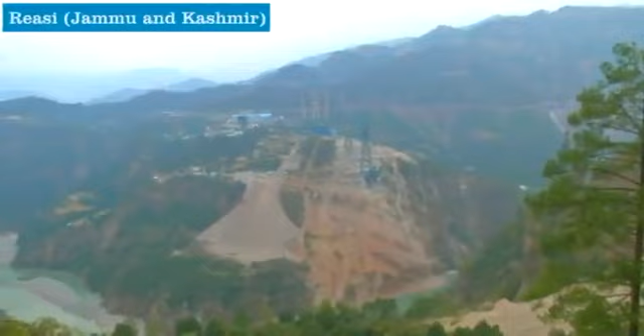The Chenab Bridge in Jammu and Kashmir will be the highest railway arch bridge in the world at 359 meters, that is 1,178 feet, even taller than the Eiffel Tower.

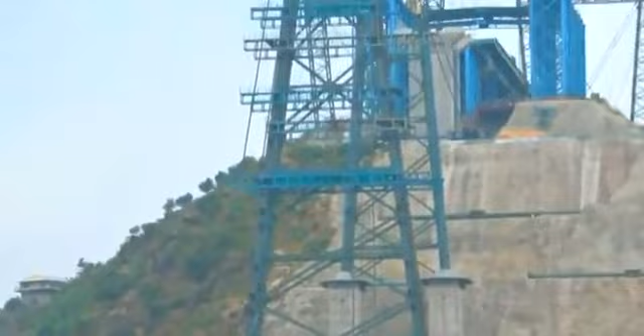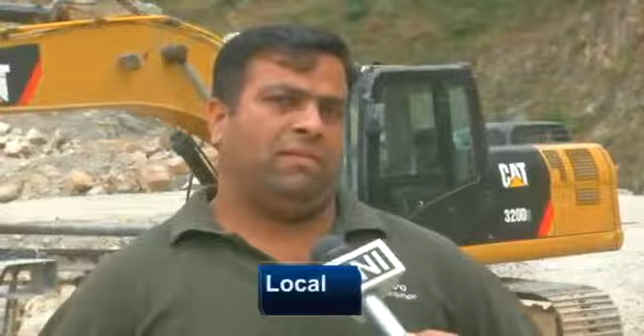Chenab Bridge will have the widest span of Indian broad gauge railway network in the country.

It is the first time in the world that a bridge has been designed for blast load in consultation with the Defence Research and Development Organisation.

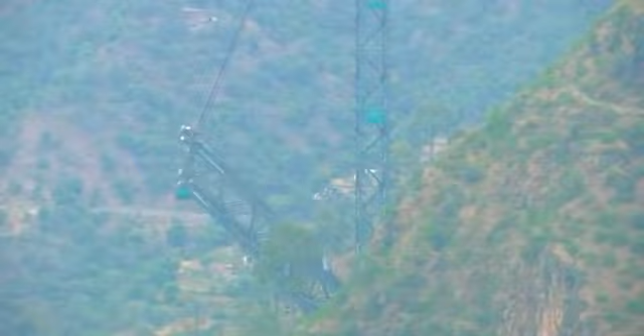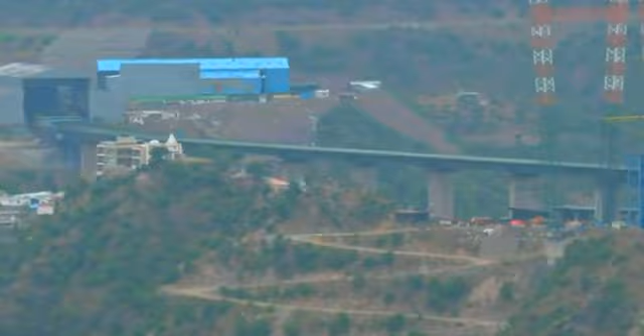An extensive health monitoring and warning system will be planned for the bridge. The bridge is under construction between Bakhal and Kauri in Reasi district of Jammu and Kashmir.

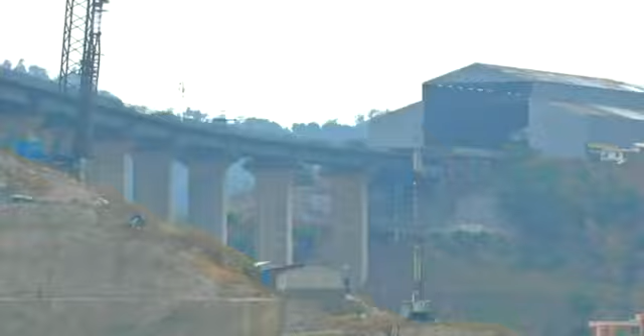The project includes construction of several bridges and tunnels along the route, of which Chenab Bridge is one. It will span across the deep Chenab River and provide access to the Kashmir Valley from Udhampur.